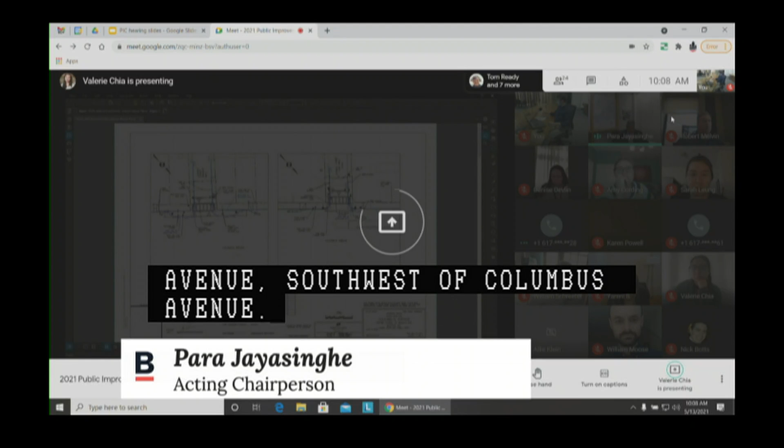Continuing to the public hearing segment of today's agenda, public hearing number 1 on a joint petition by the Massachusetts Bay Transportation Authority, the City of Boston Transportation Department, and the City of Boston Public Works Department for the making of specific repairs within the following public ways in Roxbury, consisting of curb realignment, sidewalks, and driveway curb cut reconstruction, as well as new and relocated pedestrian ramps, street lights, storm drain infrastructure, and raised sidewalks. Columbus Ave, generally between Cleve Street and Amory Street; Dixwell Street, southwest of Columbus Ave; Weld Avenue, southwest of Columbus Avenue; West Walnut Park, southeast of Columbus Ave; Bragdon Street at Columbus Ave; Academy Road, east of Columbus Ave; Amory Street, west of Columbus Ave. This was brought under new business on April 29, as shown on a set of plans entitled City of Boston Public Works Department, Engineering Division, Specific Repair Plan, Columbus Ave, Boston, 7 sheets dated April 29, 2021.

Thank you, Mr. Chair, and thank you, members of the Commission. I'm William Moose from the Boston Transportation Department. I'll be speaking on behalf of this project. I'm joined by Valerie Chia from Howard Stein Hudson, and also Eric Shire from the MBTA.

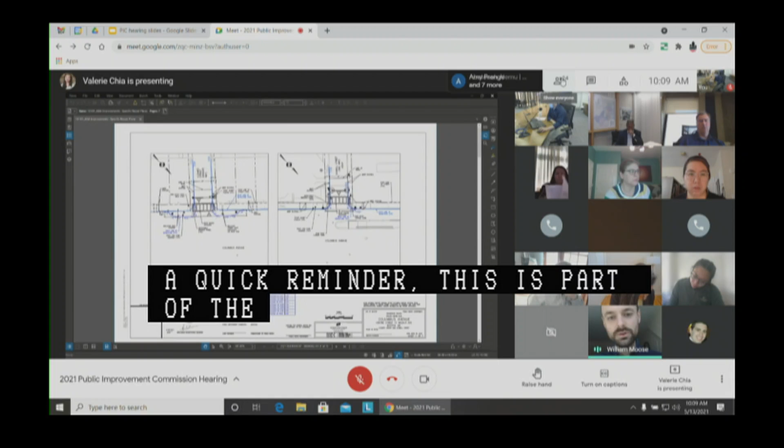Just as a quick reminder, this is part of the ongoing work to improve transit services along Columbus Ave through the bus priority corridor, along with the bus platforms and other transit measures that are already under construction. We're also making an effort to bring all of the ADA ramps along the corridor into compliance, and make pedestrian safety improvements wherever we can as well.

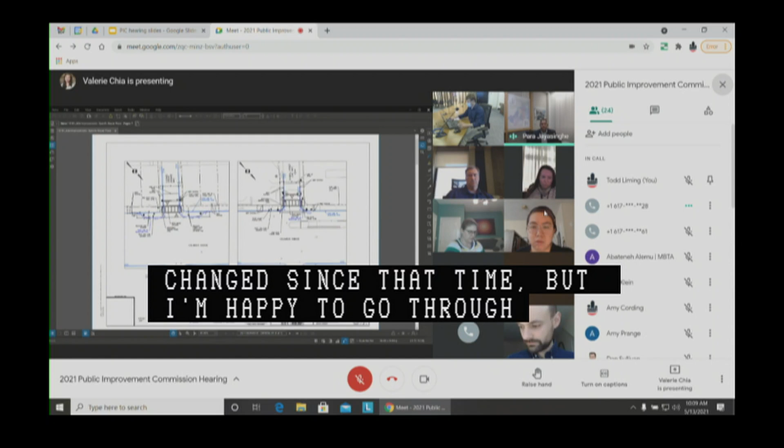And so these locations, we saw them at new business. The plans have not changed since that time, but I'm happy to go through them again if that would be helpful. Yes, William, since this is the public hearing and since these things are on tape, if you could go through them. Yep, absolutely. So the first location here is at Cleve Street.

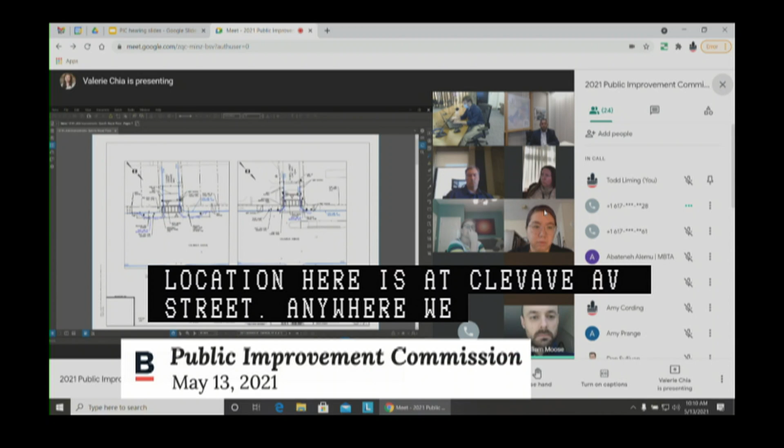Generally, anywhere we have a minor, non-signalized intersection with non-compliant ramps, we're showing a raised crosswalk being constructed. So the first one is Cleve Street. We're showing at this location some curb extensions to slow turning vehicles and improve visibility at this turn, and also to help us make the grades work better and get a better alignment of this crossing. That's the first raised crosswalk, at Cleve Street.

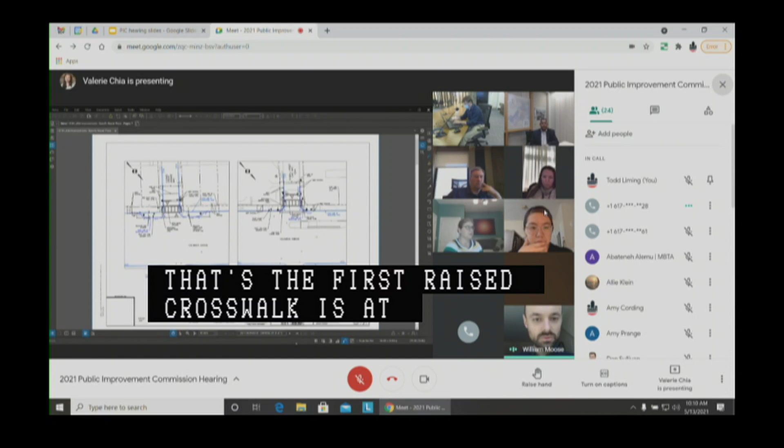Going north on the corridor, sort of towards Jackson Square, the next street is Dixwell Street. Dixwell Street does not have any curb extensions. We're keeping the curb lines as they are today, but we are proposing to add a raised crosswalk at that location, with the necessary adjustments to drainage and any other utilities at this and all locations.

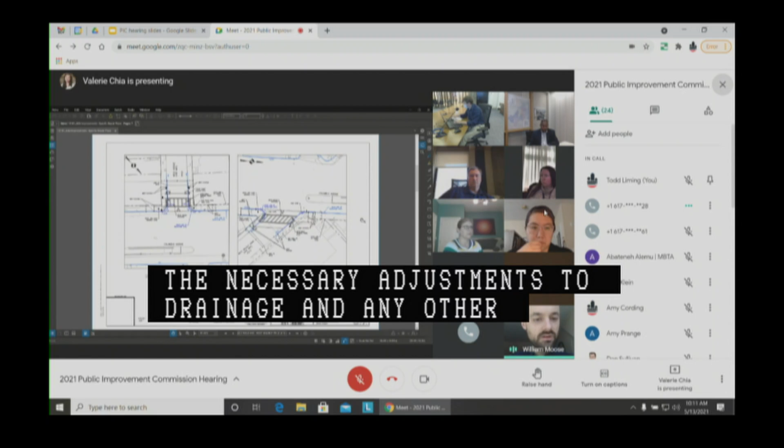So moving along, we also have the next intersection, which is Weld Avenue, another minor neighborhood street that we're proposing to add a raised crosswalk to.

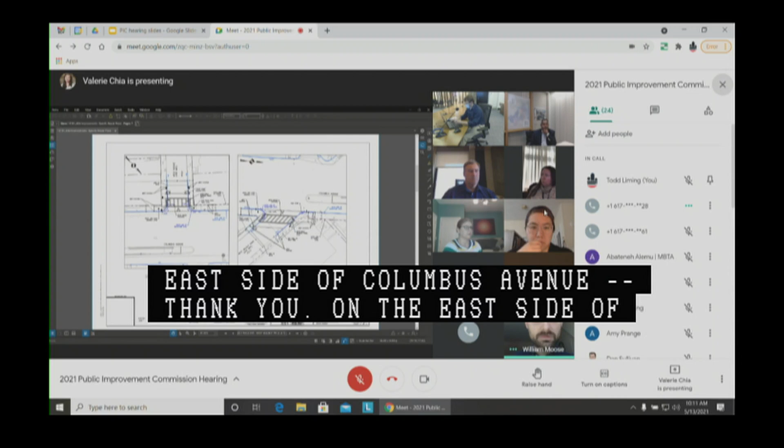And then continuing northbound on the east side of Columbus Avenue — sorry, if you could go back, Valerie. Thank you. On the east side of Columbus Avenue at West Walnut Park, we're also proposing, as part of the reconstructed ramps, a raised crosswalk at that location.

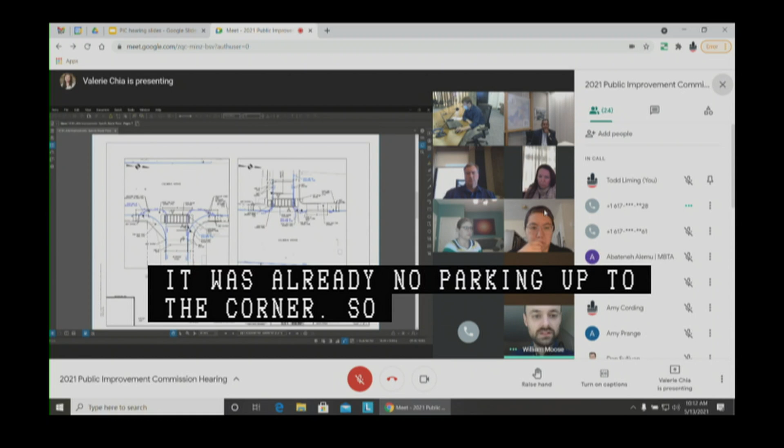So then moving on from there, the next location is at Academy Road. Here again is a location where we're proposing curb extensions along with the raised crosswalk. There's on-street parking along this portion of the corridor, and there was already no parking up to the corner, so we're sort of formalizing that through these curb extensions. Again, to slow turning vehicles and improve visibility, this dramatically shortens the distance of this crossing, which is very, very long today, and reworks the radii of these corners, as well as adding the raised crosswalk, to make this a significantly safer location.

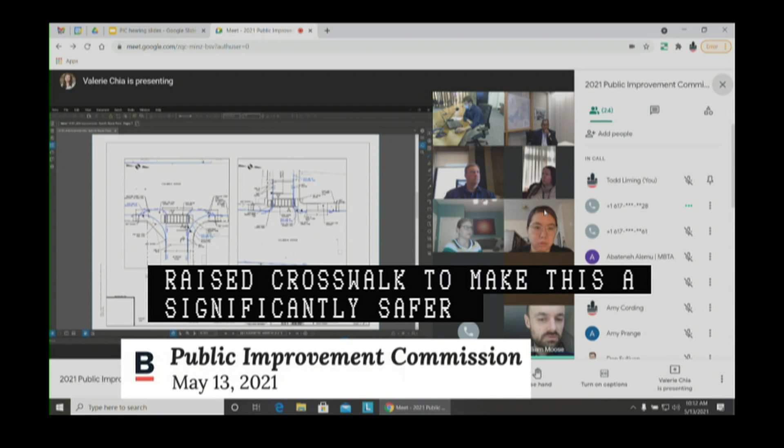And the final non-signalized location where we're adding a raised crosswalk is Amory Street. At this location, the curb lines are again staying the same, with the exception of some slight tightening of the corners, again to slow turning vehicles to more appropriate speeds. But those are all of the unsignalized locations and all of the raised crosswalk locations. I can pause there if there's any questions.

We do have one more intersection, at a signalized intersection, or I can continue and we can take all questions at the end, if that's preferable. Okay, William, if you could continue.

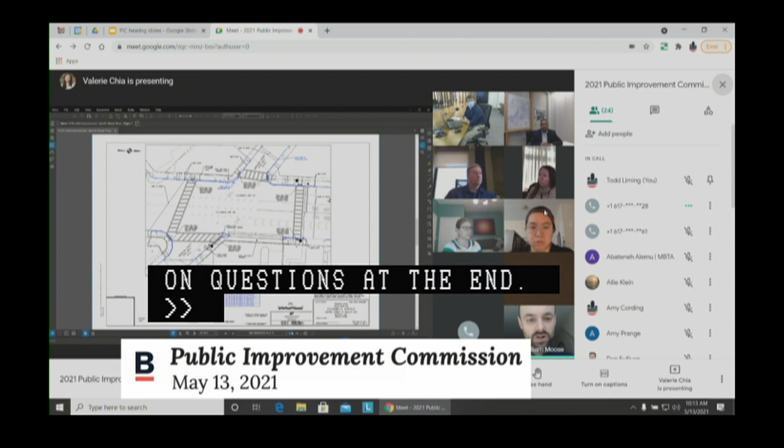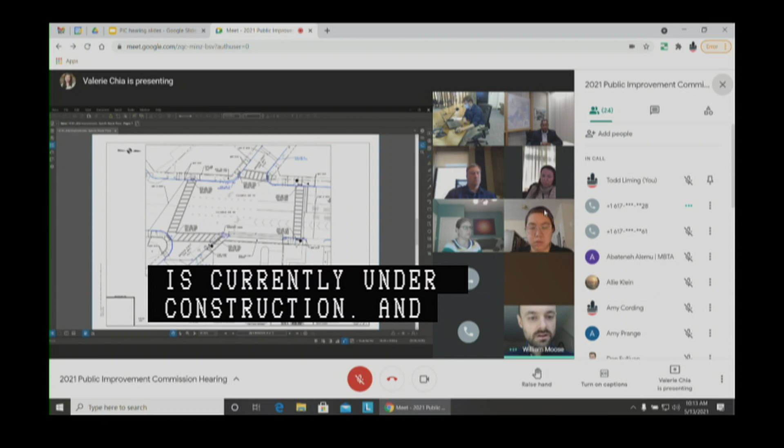Sure. So the final location is at Bragdon Street. At this location, we worked closely with the Boston Fire Department, because at the bottom of the page you can see the location of Engine 42, which is currently under construction. We worked closely with the fire department to find the optimal means of getting pedestrians safely across Bragdon Street and across the apron of the future fire station. At this location, as it is signalized, none of these crossings are proposed to be raised crossings — they are all conventional ramps, ramping down to the grade of the street. But we are adding pedestrian signals on all these minor streets that are lacking those today.

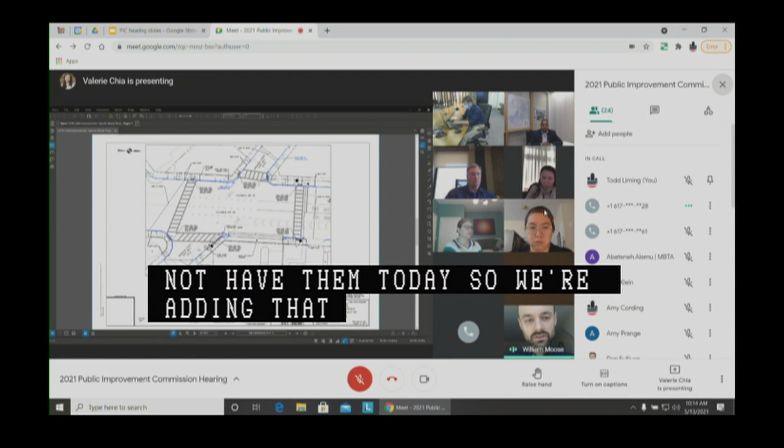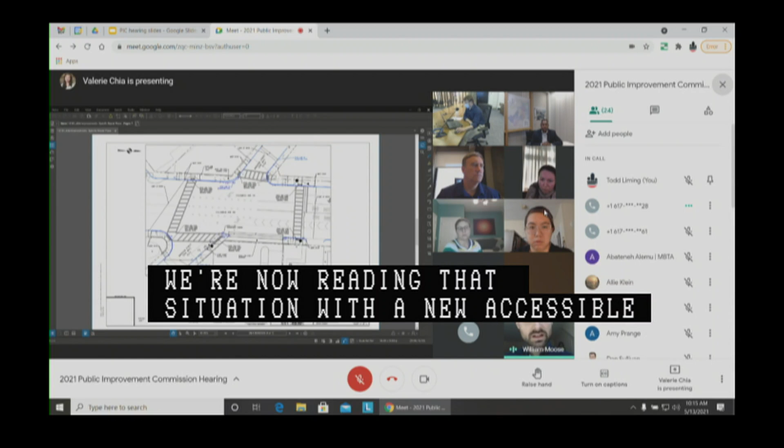So Bragdon Street does not have appropriate pedestrian signalization today. We're adding that along with reconstructing these ramps, and the crosswalk across Columbus Avenue - that is a new crosswalk. There was previously a marked crosswalk at this location, but there were no ramps and no break in the median, so it was completely inaccessible. We are now remedying that with a new accessible crosswalk with all the appropriate signalization at this location. So that concludes the extent of the project, and I'm happy to take any questions.

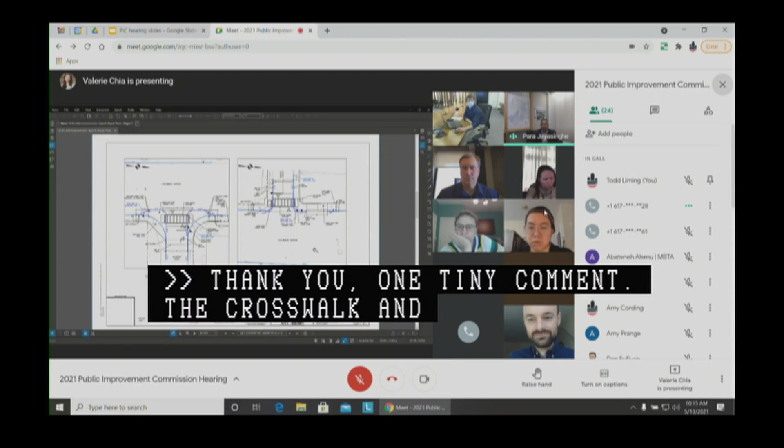Thank you, William. One tiny comment - the raised crosswalk at Amory Street and Columbus Ave, I know there's a fair amount of cut-through traffic that heads from this zone further south. They want to avoid the intersection of Washington and Columbus Ave, so they cut through here. So just respecting the volume of traffic that makes that right turn and goes down Amory Street, if appropriate signage can be placed to alert drivers that they're going to hit a raised crosswalk there. That's all I have.

Any additional comments by fellow commission members?

Good morning, William. How are you? Nice. I just wanted to follow up.

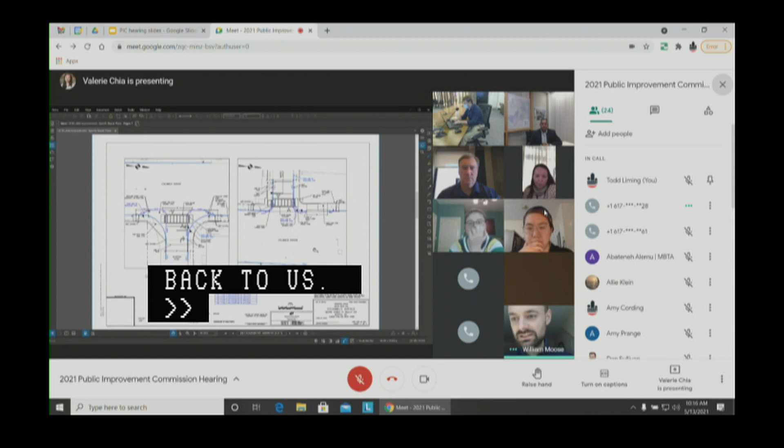I know you sent an email last night saying you were going to incorporate our comments into the construction drawing, so thanks for getting back to us. Oh, absolutely, yeah, we'll make sure all those are incorporated and we'll send them back to you for any final comments. Okay, thank you. Thank you, Denise.

Any additional comments by fellow commission members? Hearing none. Mr. Liming, are there any comments by PIC staff or members of our audience today? None.

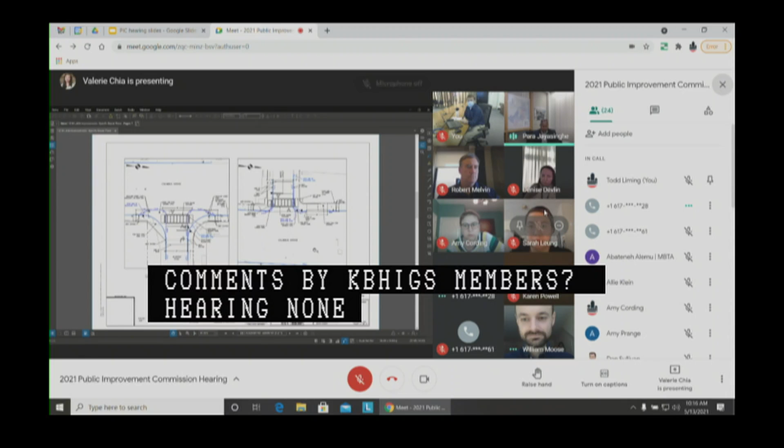That being said, I'll take a motion regarding public hearing number 1. I'll make a motion to approve a joint petition by the MBTA and the City of Boston Transportation Department and the City of Boston Public Works Department for the making of specific repairs in Columbus Ave, Dixwell Street, Weld Ave, West Walnut Park, Bragdon Street, Academy Road, and Amory Street, as read into the record by the chair.

Go ahead, second. Second. All in favor, please signify by saying aye. Aye. Anyone opposed or abstain? Hearing none, motion passes.

Thank you, Mr. Moose. You do fantastic work as always, and a great team.

Next item on the agenda, public hearing number 2, on a petition by Seaport L5 title holder LLC for the acceptance of pedestrian easements adjacent to Boston Wharf Road, a public way in South Boston, located on its southeasterly side at addresses 1 through 27, generally northeast of Congress Street. This was brought under new business on April 29th, as shown on plan entitled City of Boston Public Works Department Engineering Division Pedestrian Easement Plan, Boston Wharf Road, parcels L3 and L5, Seaport District, 1 through 27 Boston Wharf Road, South Boston, one sheet dated April 20th, 2021.

Good morning, Amy. Morning. Hi. Go ahead, good morning.

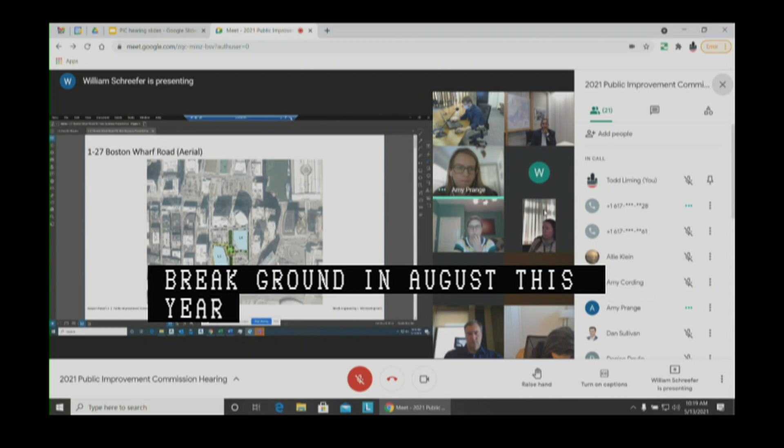Sorry, I just wanted to unmute. All right, so... all right, sorry.

So proposing specific repairs on Congress Street and Boston Wharf Road, coordinated with an overall roadway project. Sorry, I think this is the pedestrian easement. Oh, the pedestrian easement, I apologize. Yeah.

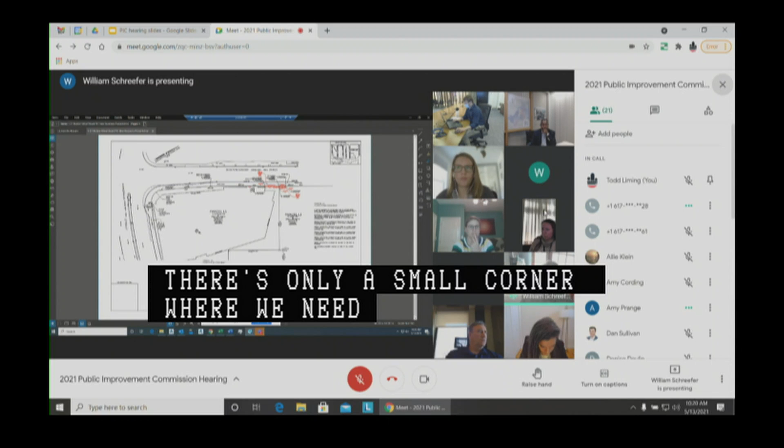So this is the pedestrian easement plan. There's only a small corner where we need to make sure that we have 8 feet provided overall, but obviously part of that's extending onto the private way. One thing I'd note is that a portion of this is on L3, so we'll be submitting separate easements for parcel L5 and L3 to extend where we need to provide that 8 feet, where there's going to be a small bump in the curb to provide parking. But that's really the extent of the pedestrian easement required on this project.

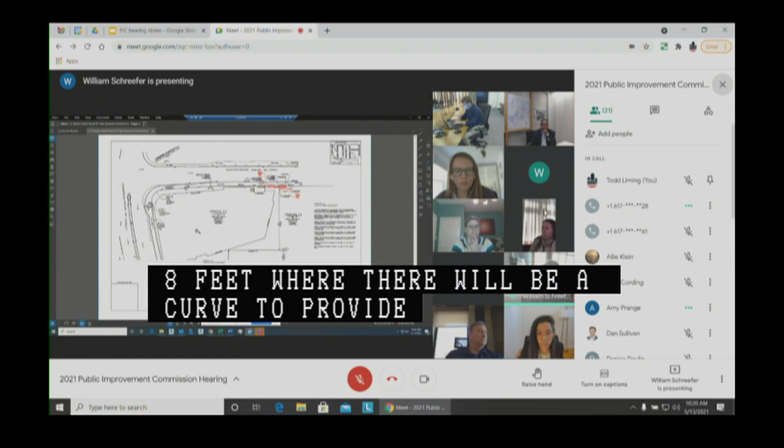Thank you, William. Any questions or comments by fellow commission members? Comments by PIC staff or members of the audience? None. I'd like to hear a motion regarding public hearing number 2.

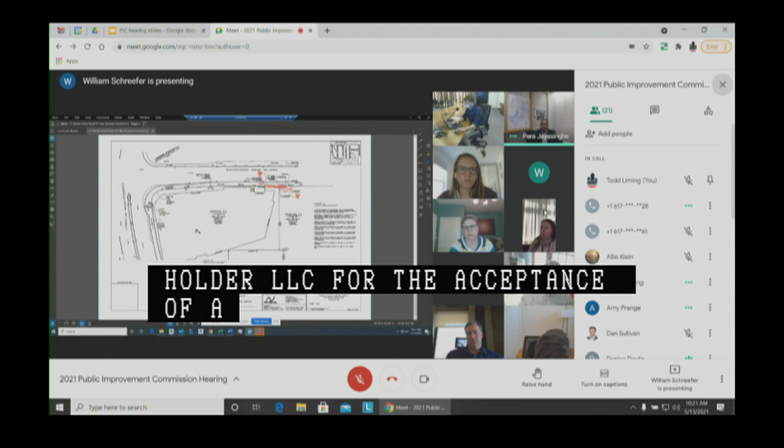I'll make a motion to approve a petition by Seaport L5 title holder LLC for the acceptance of a pedestrian easement in Boston Wharf Road as read into the record by the chair. Do I hear a second? Second. All in favor, please say aye. Aye. Aye. Anyone opposed? Hearing none, motion passes.

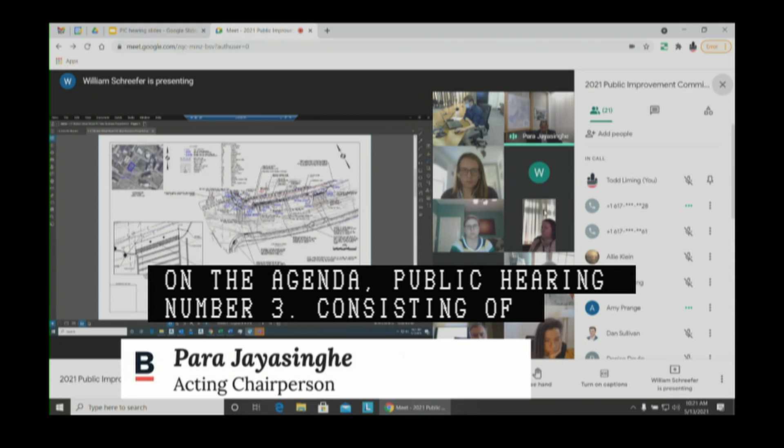Next item on the agenda, public hearing number 3 on a petition by Seaport L5 title holder LLC for the making of specific repairs within the following public ways in South Boston, consisting of curb realignment, roadway and sidewalk reconstruction, as well as new and relocated pedestrian ramps, specialty pavement, traffic signal infrastructure, street lighting infrastructure, street trees, planters, landscaping, street furniture, bike racks, storm drain infrastructure, irrigation infrastructure, bollards, driveway curb cuts, and wayfinding signage. This is all shown on Boston Wharf Road on its southeasterly side at address numbers 1 through 27 northeast of Congress Street, and on Congress Street, southeast of Boston Wharf Road.

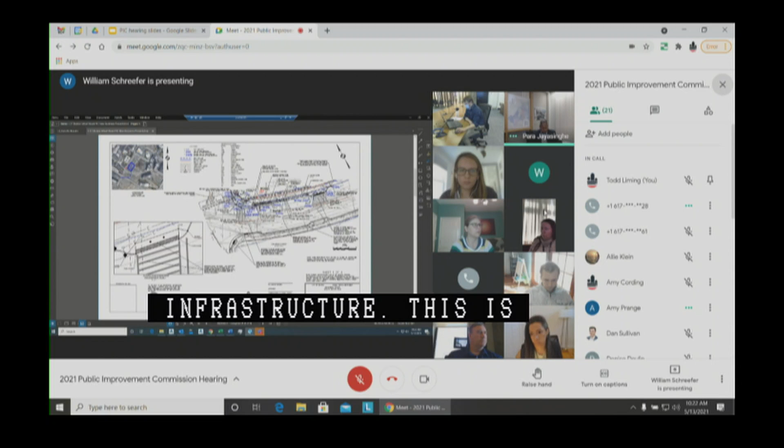This was introduced under new business on April 29th of this year, as shown on a set of plans entitled City of Boston Public Works Department, Engineering Division Specific Repair Plan, Congress Street, Boston Wharf Road 1 through 27, Boston Wharf Road, South Boston, 4 sheets, dated May 12, 2021.

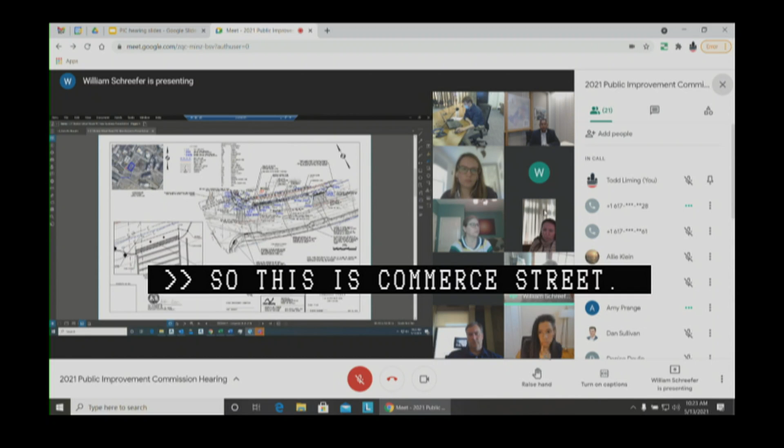So as I was just getting into, for L5 we're setting the curb based on... Excuse me, William, you need to introduce yourself because this is a separate public hearing. Understood. Will Schreefer with Nitsch Engineering, civil engineer for the project, presenting the specific repair plan. So this is Congress Street. We are setting the curb based on where it needs to be for the roadway project, and constructing everything inboard of that. So there's 360 linear feet of specific repairs along Congress Street.

Understood that Congress Street is currently under MassDOT jurisdiction, but it's going to be shifting to Boston ownership based on our understanding in the near future. So we're presenting these as if this is owned by the City of Boston. Proposing new cement concrete sidewalk, pervious pavers.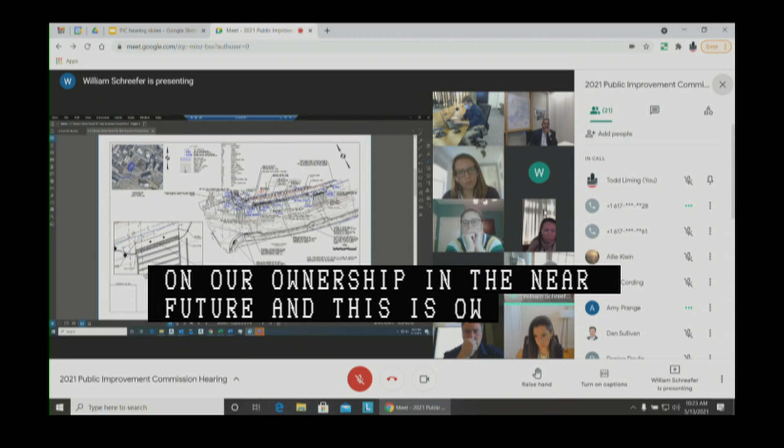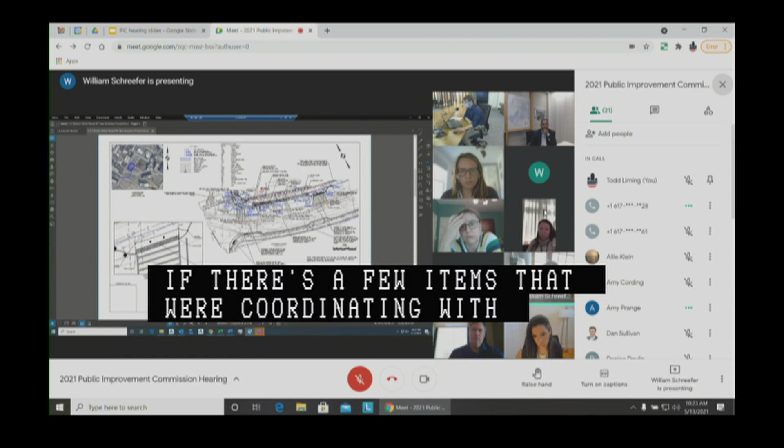There's going to be a bike station, 4 street trees going in, as well as pedestrian ramps at the corner. Over the past 2 weeks we've been coordinating with BTD and BPDA based on their comments, so this plan reflects the current state of coordination. I think there are a few items we're still coordinating with both BTD and BPDA. Reflective of that, we've shifted the location of the bike station closer to the intersection with Boston Wharf and Congress to provide better access, and kind of flipped that with the street trees and parking area we're providing.

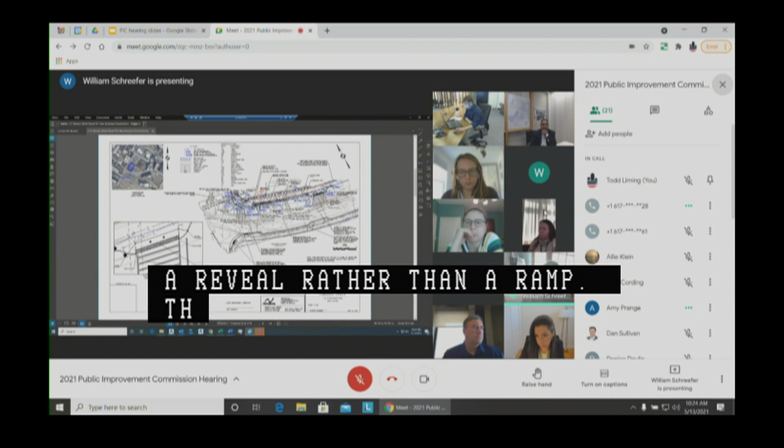There's going to be a mid-block bump out, but at this point that's going to be built with a full curb reveal rather than a ramp. The ramp itself would actually be constructed as part of the roadway project. So we'll be doing the bump out you see in the mid-block on Congress there, but that will be finished as a pedestrian ramp with bollards, depressed curb, and detectable warning surface as part of the roadway project when that comes through, providing well over 8 feet of pedestrian sidewalk throughout on Congress.

And as part of coordination with the BPDA, we have widened the access to the elevated walkway along Boston Wharf from 7.5 feet to 8.5 feet on its access from Congress.

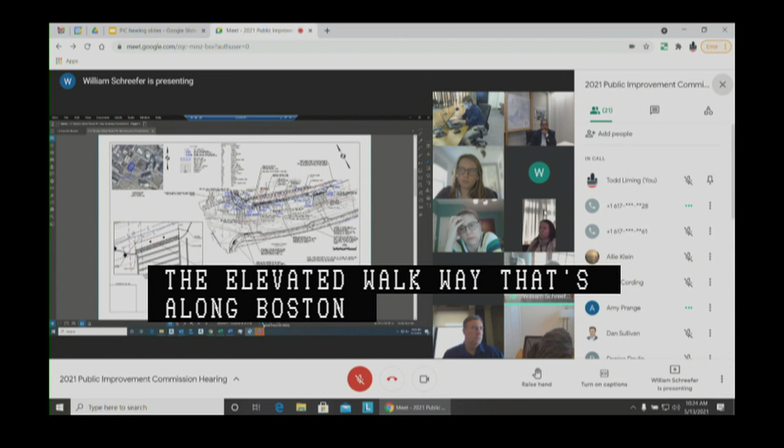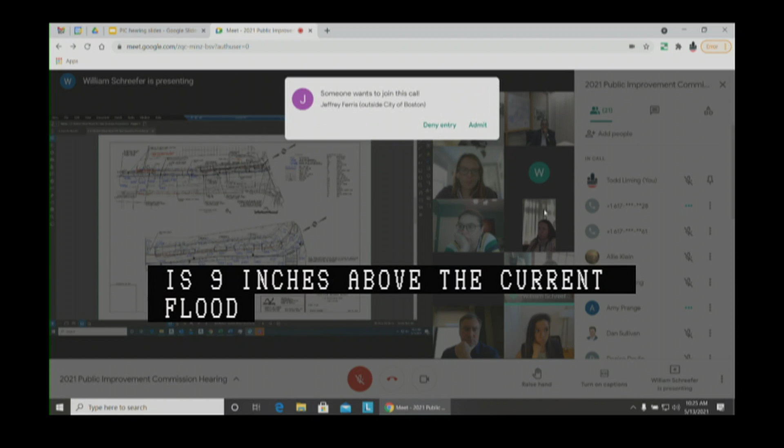Shifting to the Boston Wharf Road plans, a portion of this site is in a flood zone, so we wanted to pursue a resilient design that elevated it as much as possible above the floodplain to target future sea level rise conditions. We've raised all the retail entrances along Boston Wharf Road to 17.25, which is about 9 inches above the current floodway. So you have the separated elevated walkway along with the provided public way access, and there's access to that elevated walkway as mentioned from Congress Street. There's also a ramp down on Boston Wharf towards the north end that connects back with the public way.

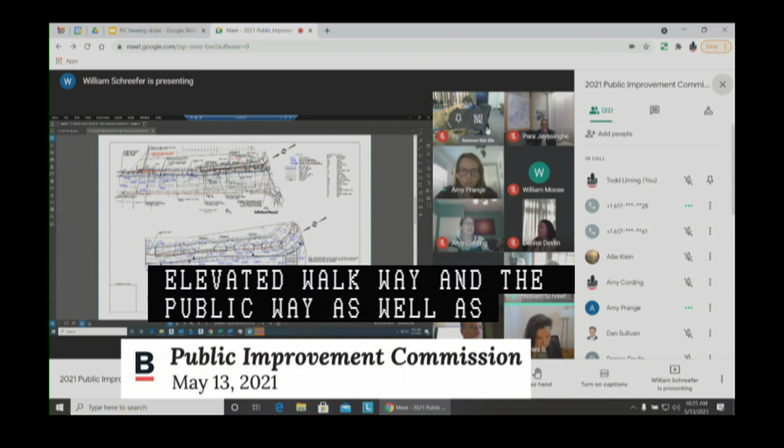Providing landscape beds in the separation between that elevated walkway and the public way, as well as stairs that would also provide direct access to the storefronts that are in there, and small trees that would be able to survive in the landscape beds that are there up against the building as they are.

This is where the pedestrian easement is being proposed on the northwest corner of the building, where we need to provide the minimum of 8 feet.

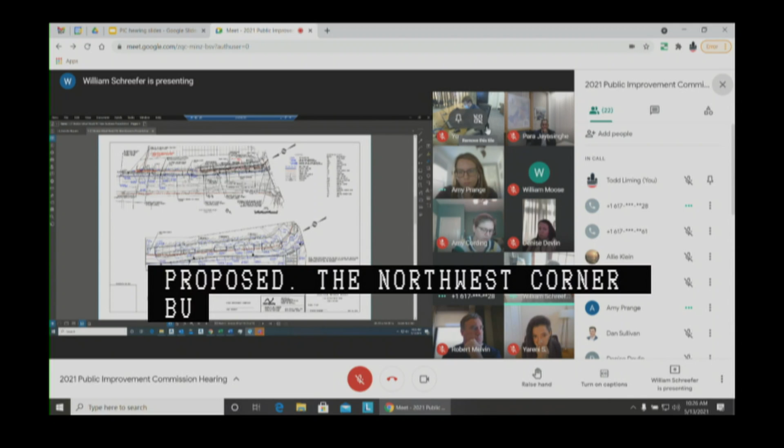As part of coordination with BTD, we had a portion of the pickup drop-off along the north end of this that will be fully built out when L3 comes through, included on the specific repair plans. We expanded that by an additional 40 feet to accommodate 2 potential extra parking/pickup drop-off spaces along there.

We have modified the locations of a few light poles to accommodate changes in the landscape beds and stairs, and recessed doors at the building to provide at least 6 feet of clear space between the door swings and the edge of the sidewalk/stairs, to accommodate comments from the BPDA on providing that amount of clear space up there.

Generally, it's about 6.2 feet in width, but we have modified the design of the doors and the overall landscape beds and stairs to accommodate a minimum of 6 feet everywhere.

That is the extent of the specific repairs that are being proposed on this project, reflective of our latest coordination with BTD and BPDA.

Thank you, William. At this point, are there any comments by fellow commission members?

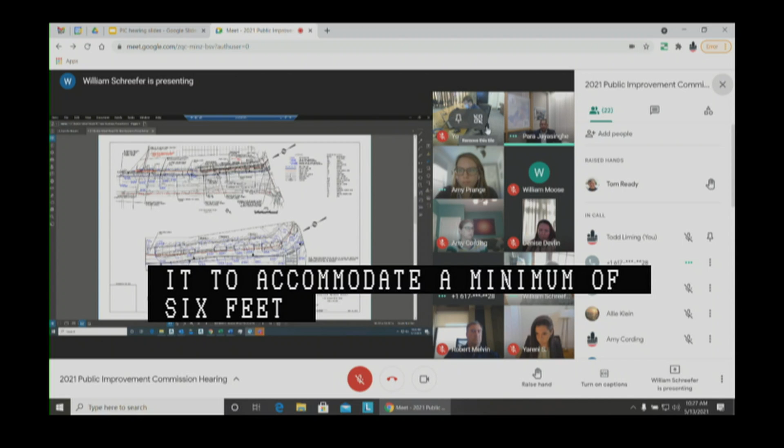We would just like to thank the team for incorporating that second accessible route near the intersection. We appreciate their receptiveness to that suggestion.

Thank you, Ms. Young, for your comments. Any further comments? Sorry, excuse me. I'm sorry, Para, I just had a general comment.

I was just curious where we were in the site plan review process for Boston Water and Sewer. Our initial submission has been returned with comments. We returned a new submission with responses to those comments and additional documentation from the MEP this week, so we'll be moving forward with the site plan approval process from there. Okay, thank you.

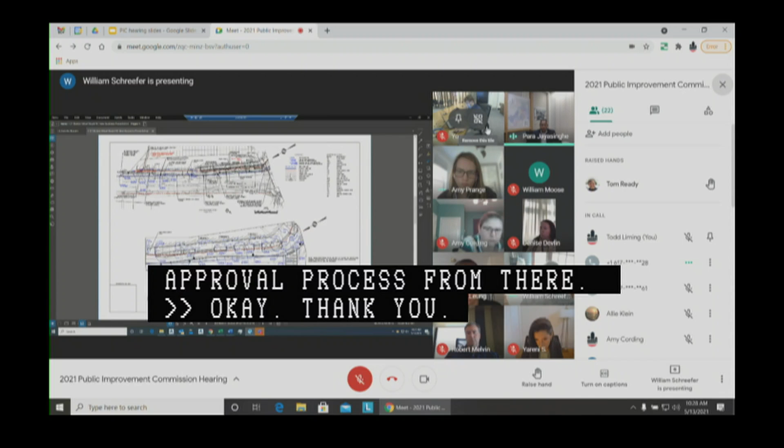William, will any of those comments impact the plans that you have put forth in front of this commission today? No, largely the comments are about that we're proposing a rainwater reuse system as part of the building. So it's neutral, it's not going to impact. No, will not impact. Thank you, William.

Any further comments by commission members? Ms. Prange, what is the status of the maintenance agreement for all of this good stuff?

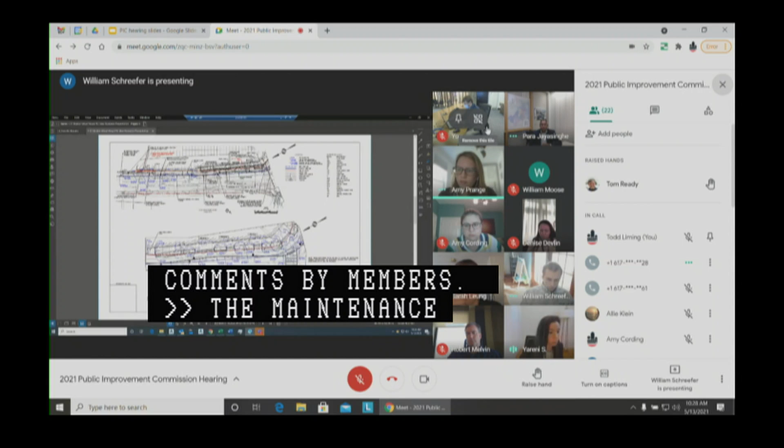I think Jody, you have been back and forth with Leung. Yeah, we'll be submitting them shortly this week. It's going to be a separate amendment though, right? To the LMA, master LMA. Yes, that's right, we are coordinating with the city regarding an update to the master LMA.

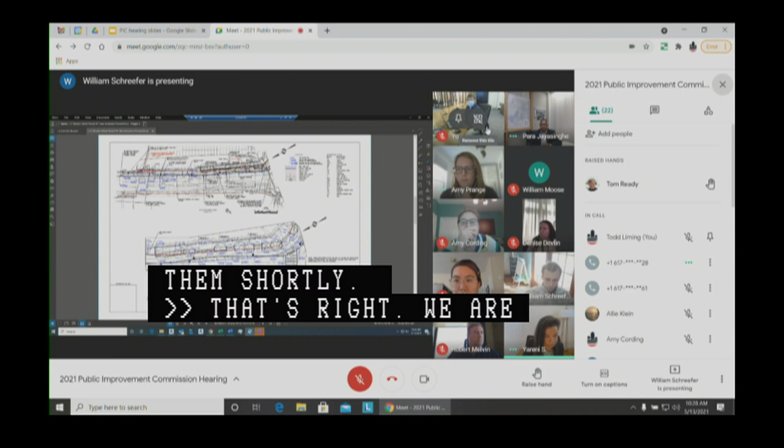Thank you. Mr. Liming, any comments by PIC staff and all members of today's audience?

Mr. Tom Ready would like to speak. Go ahead, Tom. Thanks, Todd. Thanks, Para.

Just a question with regard to accommodation for cyclists along Congress Street. I wasn't able to see how that was going to be done. I know I've seen the TAPA for Boston Wharf Road, and it's not obvious to me how cyclist traffic is accommodated on Congress Street.

Right now, there are no dedicated bike lanes planned for Congress Street. So the plan is to mix them in with traffic? I believe so, yes. Okay, and we think that's appropriate?

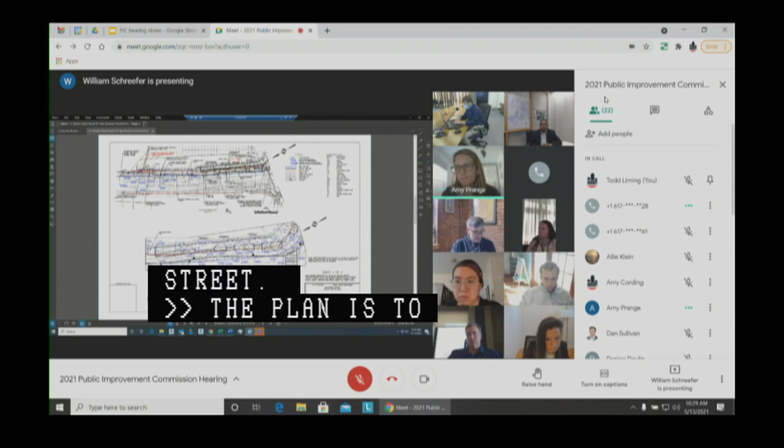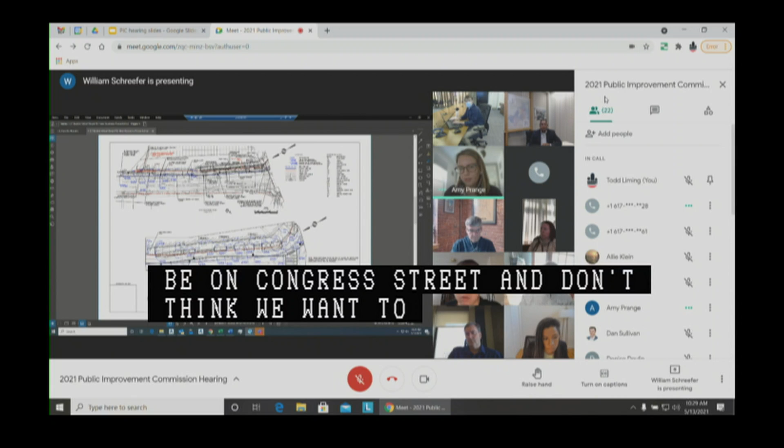We've done several studies on how you could add bike lanes to Congress Street. There's a city project where there might be BRT on Congress Street. I don't think we wanted to commit to anything on Congress Street, so right now Boston Wharf Road is really where we're focusing our major bike lane improvements on.

So the city assumes that people riding bikes down Congress Street through the Gateway Project are going to stop at Boston Wharf Road and they're not going to continue? So we're going to provide an unsafe, a less safe condition as they head down towards those stairs in the plaza, the attraction point for Seaport Square.

It just doesn't appear as though it's frankly well thought out. So that's my comments, Para. I'll follow it up in writing.

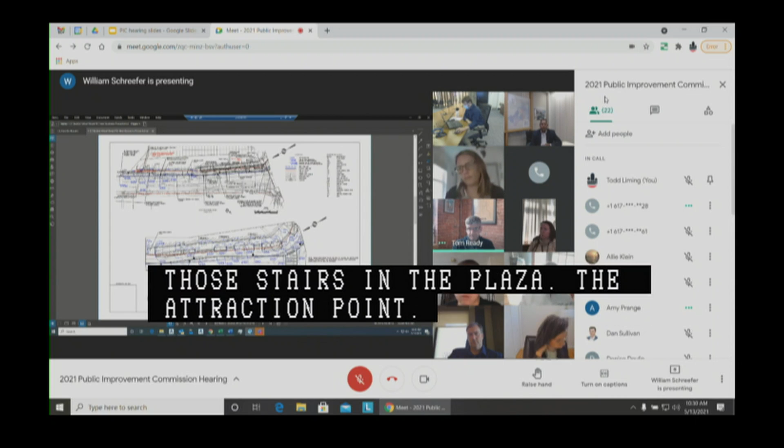Thank you, Tom. Give me a second because your comments are a little bit interesting in that sense. So Ms. Cording from BTD, Amy, do you want to respond to Mr. Ready's thoughts?

Yeah, I mean, it's essentially that we're trying to figure out Congress Street. I don't think we're ready to answer that because we're fitting it together. We have the Public Works project further up, and there are other pieces we're trying to understand, inclusive of the bus and how it interplays with everything else. So I just don't know that we're ready. Not that we don't think bikes should be on Congress Street, I just don't think we're at a point where we could successfully figure out what would be here that would be future-proof.

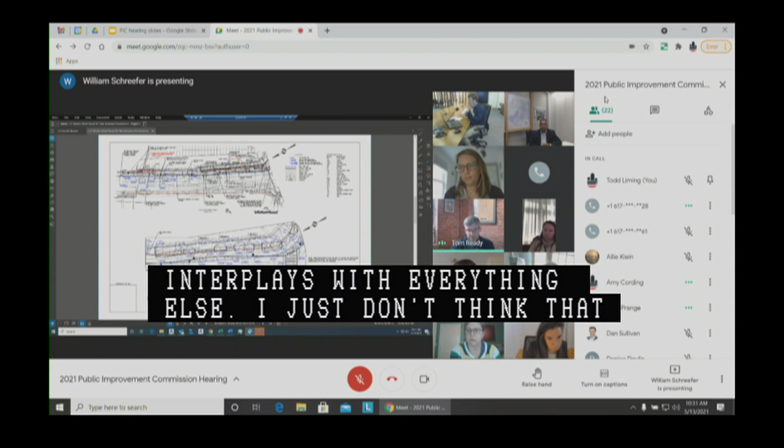So I'm aware, Amy, of BRT up on Summer. I'm not aware of a BRT project on Congress. In fact, the last discussion I had with Matt Moran was that the city wasn't anticipating BRT on Congress. Yeah, so I think it's really just that the conversation with Summer and that bus lane, and all of the bus movements through here, is still open. We're still in that conversation.

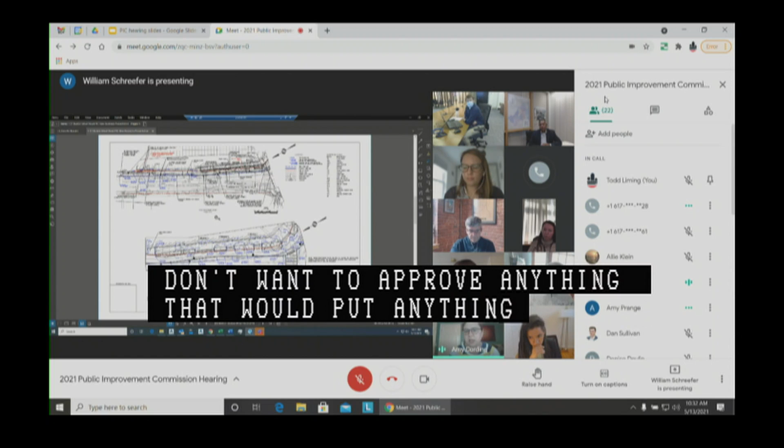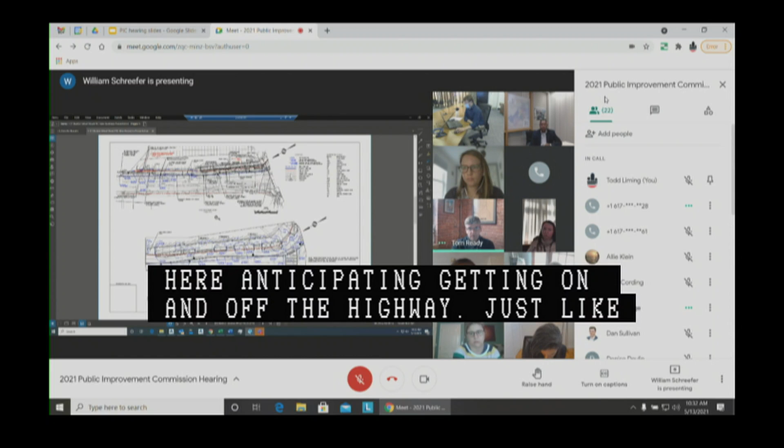So it's just that we don't want to approve anything that would put anything in the way of future possibilities. I think in the future there's probably a need for cycle infrastructure up here, I just don't know where or what that should look like. It becomes complicated, as you guys all know, with the on and off ramps onto I-90 as it approaches those intersections. I get that. It's just confusing as to why we wouldn't be thinking about vehicles speeding down here anticipating getting on and off the highway, just like they do along Atlantic Avenue and in the downtown area. So a well thought through approach is really needed to provide safe passageway for cyclists, right? I think we'd all agree.

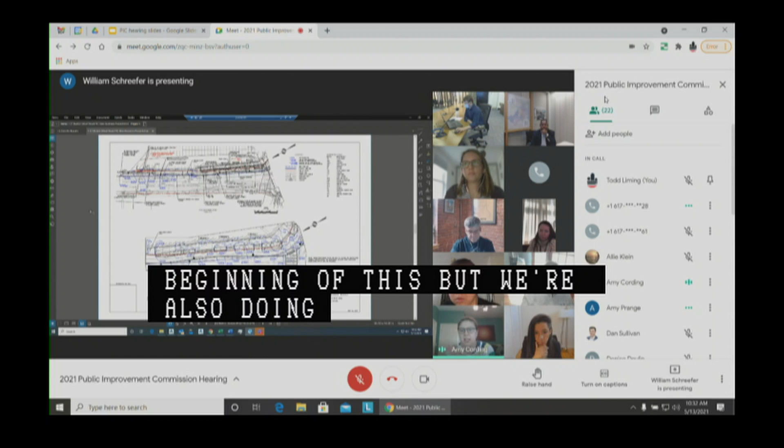One thing I would also add, alluded to earlier, is that there are some jurisdictional issues out here, and some streets that are in MassDOT control that are coming to the city. So our ability to make firm decisions on the future of Congress Street really depends on when it becomes ours. Right now we can't declare anything required on a street that's not ours, but we do know it's going to become ours, and we are thinking about its future.

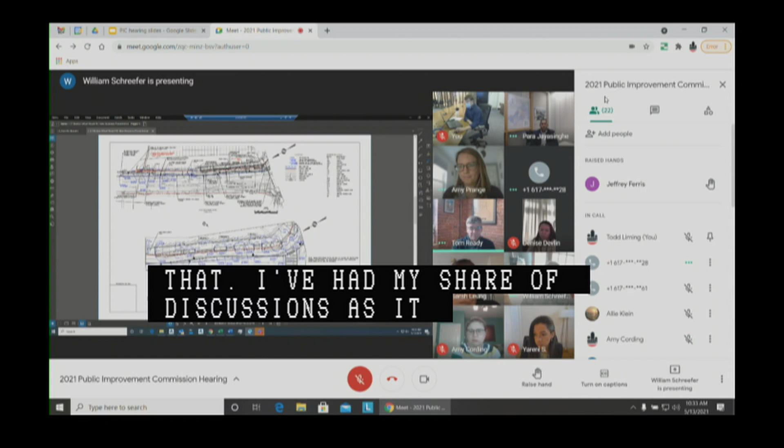Yeah, thanks, and I appreciate that, Amy. I've had my share of discussions with MassDOT, as it relates, and Massport, as it relates to Northern Avenue, so I understand. Okay, thank you. Thank you, Para. Tom, thank you and appreciate your comments. Scott, appreciate your feedback. Any further comments by members of the audience?

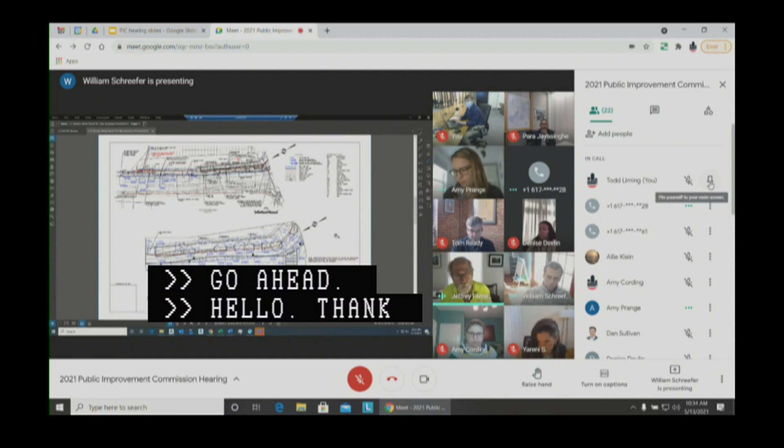Yes, Mr. Jeffrey Ferris, go ahead. Hello, thank you. I would concur with Tom Ready's comments that there needs to be a bike accommodation here. It looks like I meant to come for the Columbus Avenue discussion, and we have the same issue there, where a project went forward without bike accommodation, saying 'we're going to do that later.' But if the city's committed to a complete streets program, you need to have a complete plans program, not say we're going to do that later. So I agree wholeheartedly that there needs to be better bike accommodation here.

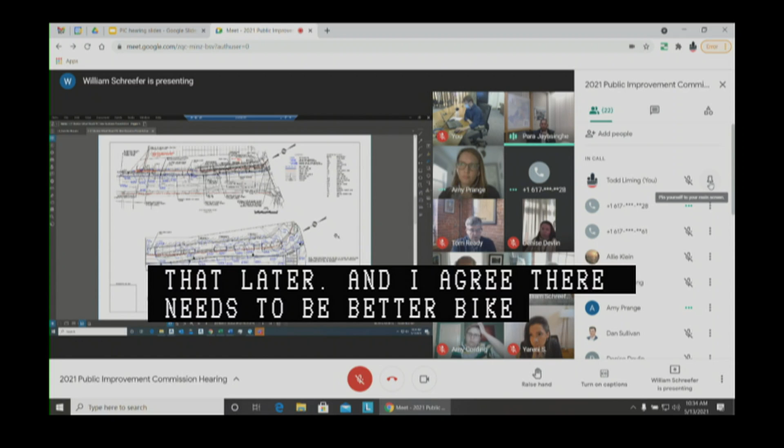Thank you, Jeffrey. It's always good to see you and hear your concerns, well articulated as always. But I think I'm confident to say that the city forces and city departments are equally minded in understanding that we need truly a multimodal transportation system. It's just an issue of timing these efforts and integrating the best use of our roadways. And I believe Ms. Cording responded to your similar sentiments as mentioned by Mr. Ready.

Thank you, Jeffrey. Any further comments by members of the audience? Nobody in the audience. I will mention, just for the record, this is actually on a co-petition by Seaport Square Development Company, LLC. Just a matter of housekeeping. Thank you, Dan.

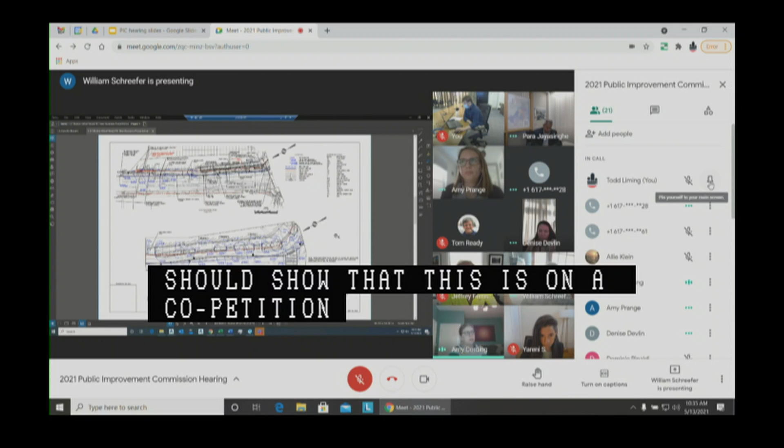Seeing no further comments, I would like to get a motion regarding public hearing number 3. I'll make a motion to approve a petition by Seaport L5 Title Holder LLC and Seaport Square Developer LLC, did I get that right, Todd? All right, for the making of specific repairs on Boston Wharf Road and Congress Street, as read into the record by the chair. Second. All in favor? Aye. Anyone opposed or abstain?

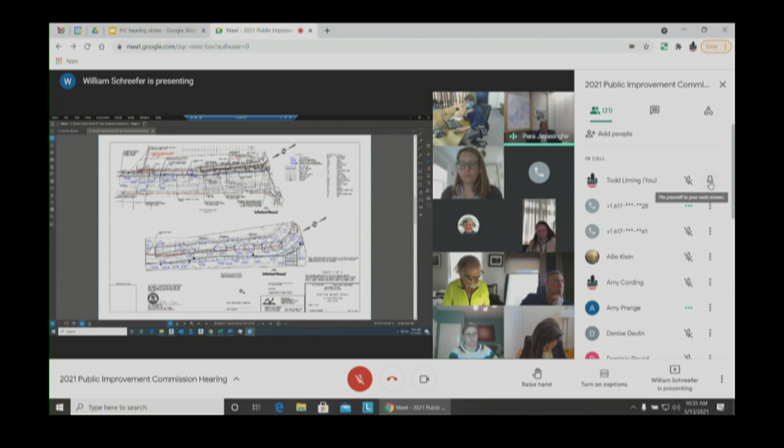Motion passes. Next item on today's agenda, public hearing number 4, on a petition by Seaport L5 Title Holder LLC for the granting of a projection license for the installation of a canopy over a portion of the sidewalk within Boston Wharf Road, a public way in South Boston, located at the easterly corner of its intersection with Congress Street, generally at addresses number 1 through 27. This was shown under new business on April 29, as shown on a plan entitled City of Boston Public Works Department, Engineering Division License Plan, Boston Wharf Road and Congress Street, 1 through 27 Boston Wharf Road, Seaport District, one sheet dated March 2021.

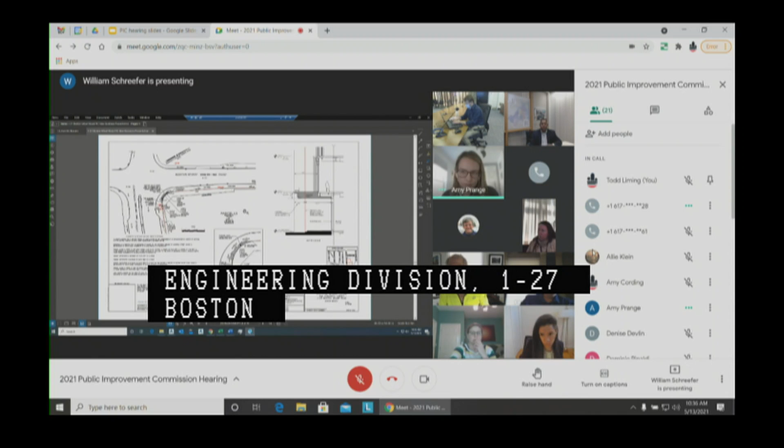So this is the canopy license plan being proposed in front of you. It's really just at the corner of... William, if you could... Sorry, this is Will Schreefer with Nitsch Engineering. Thank you.

So this is the canopy license project. It's really just at the corner of Congress Street and Boston Wharf Road where the property line itself is rounded. We're proposing a small extension in that area for the canopy line as it goes around that corner. That is the extent of the canopy license that we're requesting on this project.

Thank you, William. Comments by commission members? Hearing none.

Comments by PIC staff and all members of today's audience? At this point, I'd like to hear a motion regarding public hearing number 4.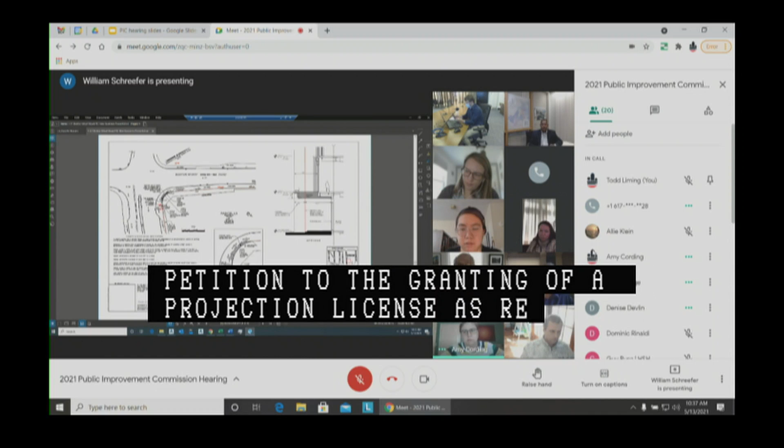I'll make a motion to approve a petition by Seaport L5 Title Holder LLC for the granting of a projection license in Boston Wharf Road as read into the record by the chair. Second. All in favor? Aye. Anyone opposed or abstain? Motion passes.

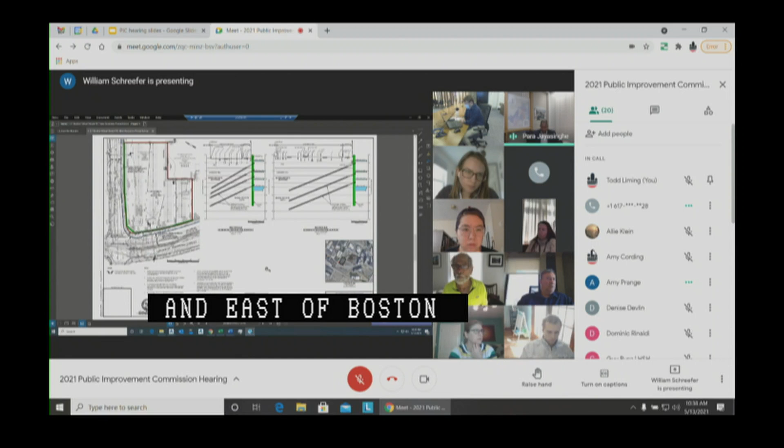Next item, public hearing number 5 on a petition by Seaport L5 Title Holder LLC for the granting of an earth retention license for the installation of a temporary earth support system within the following public ways in South Boston: Boston Wharf Road on its southeasterly side at address numbers 1 through 27, northeast of Congress Street on its northeasterly side, southeast of Boston Wharf Road. This was brought under new business on April 29, as shown on a plan entitled City of Boston, Public Works Department, Engineering Division, Temporary Earth Retention Plan, Boston Wharf Road and Congress Street, Boston, one sheet dated April 28, 2021.

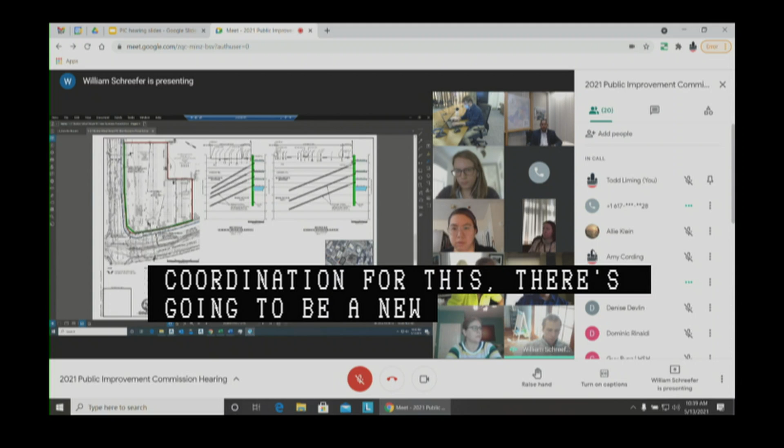So this is Will Schreefer with Nitsch presenting this plan. As you see in front of you, this is the temporary earth retention plan with sections along Boston Wharf Road and Congress Street showing the temporary support of excavation that would extend into both roadways. The tiebacks shown there are temporary and would be detensioned and abandoned in place after work is completed. As part of coordination for this, there's going to be a video inspection of a BWSC drain main that is going to be included on our plans and as part of the site plan approval. But otherwise, generally, that is the extent of the plans and the comments that we have received on this process.

Thank you, William. Comments by commission members? Hearing none. Comments by PIC staff and all members of this audience?

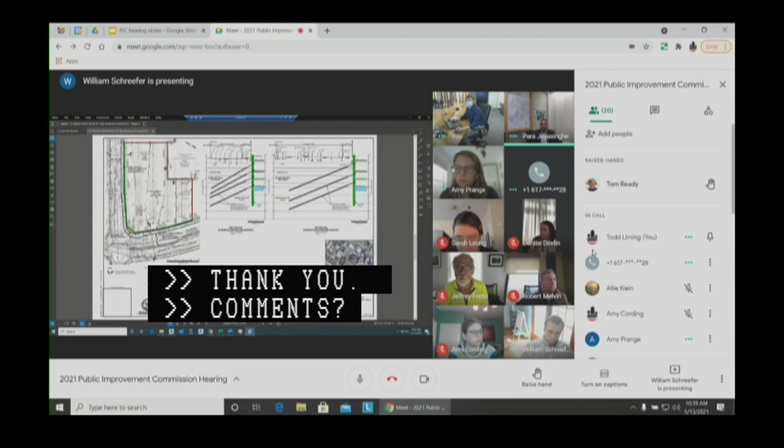Go ahead. Yeah, thank you again, Todd. Just a quick question with regard to groundwater, the groundwater trust and whether the well monitors that are in place along Congress Street are sufficient for this parcel. I don't know if that's been looked at.

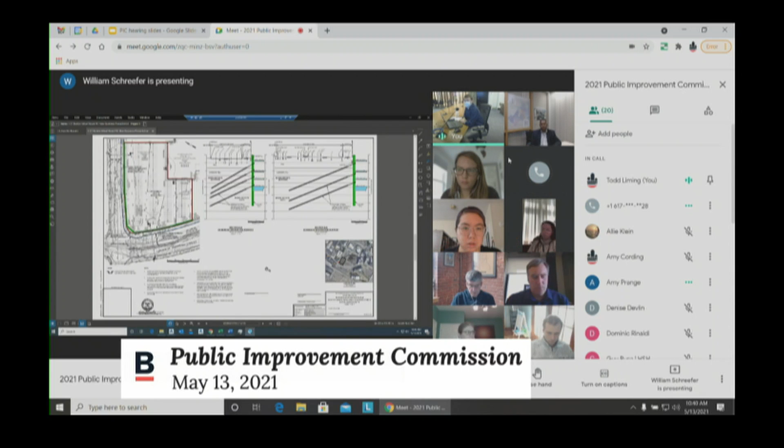Thank you, Tom. Normally, these plans are sent towards the Boston Groundwater Trust. Mr. Liming, could you fill in the blanks? I believe that there are a number of water monitoring wells in this general area. I would imagine that they're not going to be impacted by this project. I would have to defer to the Groundwater Trust as to whether additional wells are needed in this area, but I'm happy to check with Christian Simonelli and check back with the commission after the fact.

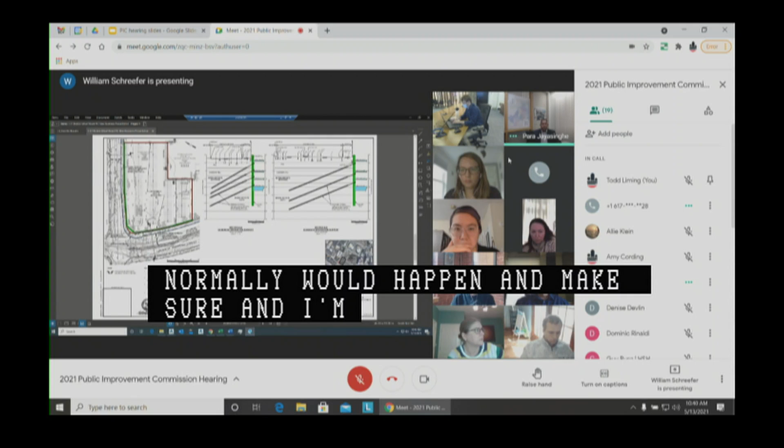Okay, thank you. I'm sorry, Mr. Ready, it is normally our process where all these plans do go up to the Groundwater Trust, and if they feel the need for the inclusion of any additional wells, they do let the PIC staff know. So that's what normally happens, and Mr. Liming will make sure, I suppose, that that process was followed on this occasion, and if they are needed, they will be included, and I'm confident that the petitioner will take the necessary steps to install any additional monitoring wells. Is that safe for me to say, Ms. Prange? Yes, that's correct. Absolutely.

Thanks, Tom. Yeah, I just wasn't sure within the process itself when it is, when it occurs prior to or after or in conjunction with, right? Thank you. Thank you, Tom. It's always good to hear you. Any further comments by members of our today's audience?

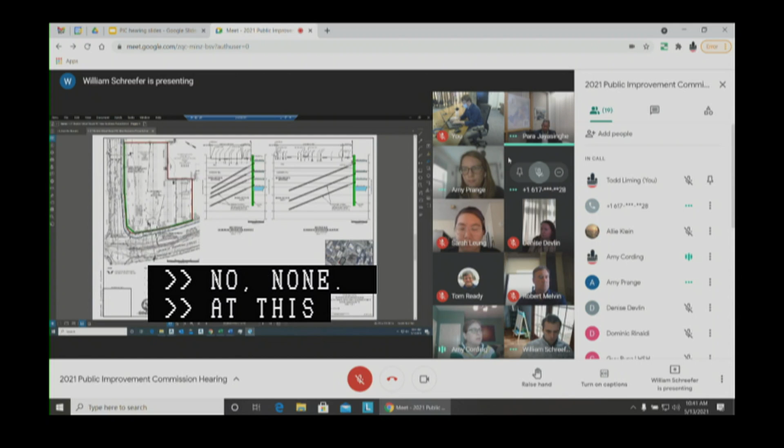No, none. Wonderful. At this point, I'd like to hear a motion regarding public hearing number 5. I'll make a motion to approve a petition by Seaport L5 Title Holder LLC for the granting of an earth retention license in Boston Wharf Road and Congress Street as read into the record by the chair.

All in favor? Aye. Anyone opposed or abstain? Motion passes. That concludes the public hearing segment of today's agenda.

Now we shall move to the new business portion of today's hearings. New business item number 1, Gurney Street, Tremont Street, Station Street, Roxbury, route of location on a petition by Eversource Energy.

Good morning, Dominic Rinaldi with the BSC Group on behalf of Eversource Energy, and I believe there are a couple of Eversource folks on the line as well. If they are, I'll let them introduce themselves. Hi, this is Allison Klein, I'm the underground transmission engineer on the project from Eversource. Okay, that would seem to be it.

The project involves granting a location for underground conduit and wiring to install a reverse current switch. If I may present, I do have a plan, if that's all right. Please go ahead, we do need to see something going on.

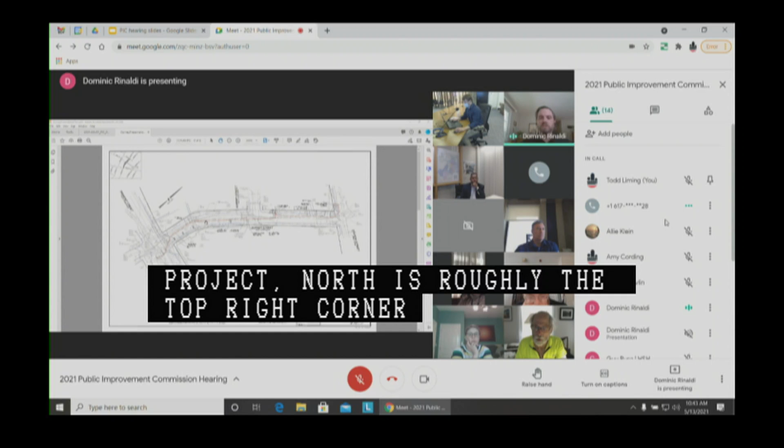Go ahead, Dominic. So on the plan, we just updated it to show the proposed line in red and the existing curb lines in blue. To orient you, project north is roughly the top right corner of the plan. Down at this end, south end of the project, is Tremont Street, and Gurney Street runs roughly south to north to Station Street. There's also an intersection here, which is weirdly enough also called Gurney Street.

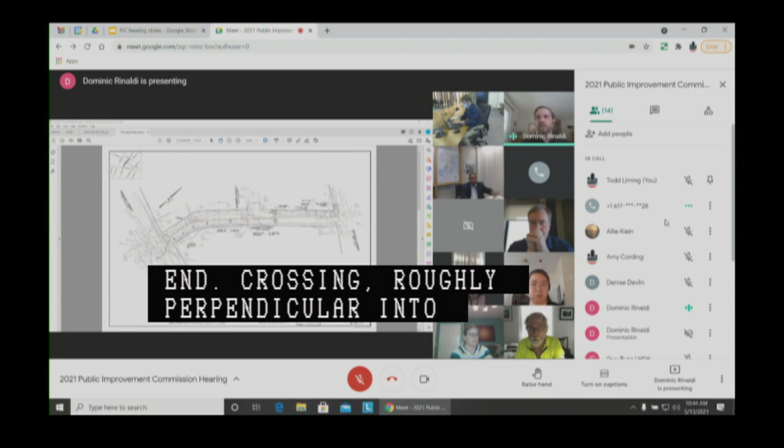Down at the south end of the project is the Roxbury Crossing T station. The project basically involves installing a bonding manhole at the south end in Tremont Street, crossing roughly perpendicular to Tremont Street into Gurney, installation of another pull manhole for cable friction and tension purposes, continuing down Gurney Street past the intersection where we'll switch over to the west side of the street, install a reverse current switch, which will be located in a small metal above-ground enclosure in the sidewalk between two street trees, and then continuing back along the west side of Gurney Street into Station Street and connecting to an existing MBTA manhole in Station Street.

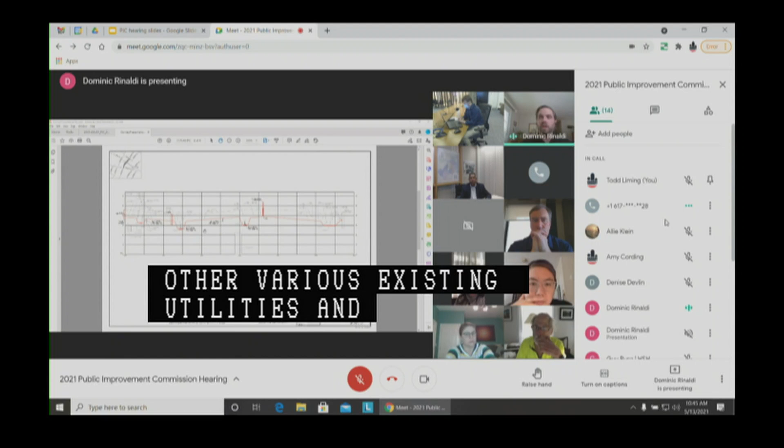From a profile view, you can see again in red, starting left to right on Tremont Street and the bonding manhole, running generally about 3 feet below grade, except where we have to dip below other existing utilities, coming to the pull manhole, the reverse current switch above grade, and then ultimately connecting back into that MBTA manhole. Through the review process, the line has shifted a little bit here and there.

One of the big drivers was agreement with Boston Water and Sewer to maintain a minimum of 3-foot horizontal separation where we roughly parallel their drain, sewer, or water lines, and an 18-inch minimum vertical separation everywhere we have to cross their lines, which is generally what we're trying to maintain with other utilities as well.

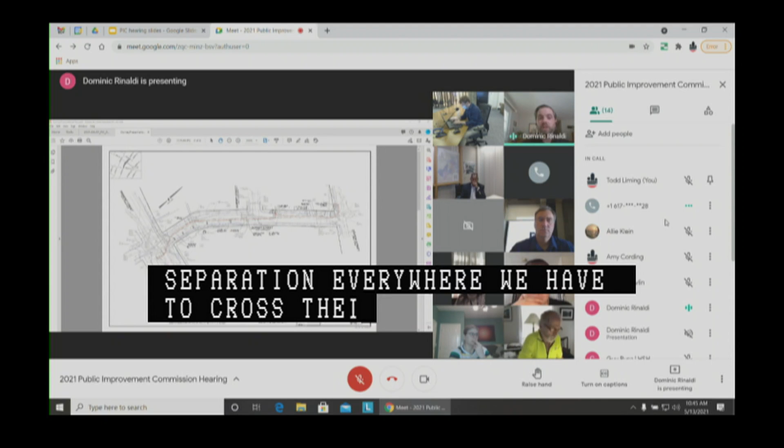The project would be looking to start and go in the ground basically as soon as possible. It's getting late in the spring to call it spring, so we'll call it early summer, and it should take roughly, the estimate is, 3 weeks to a month to complete.

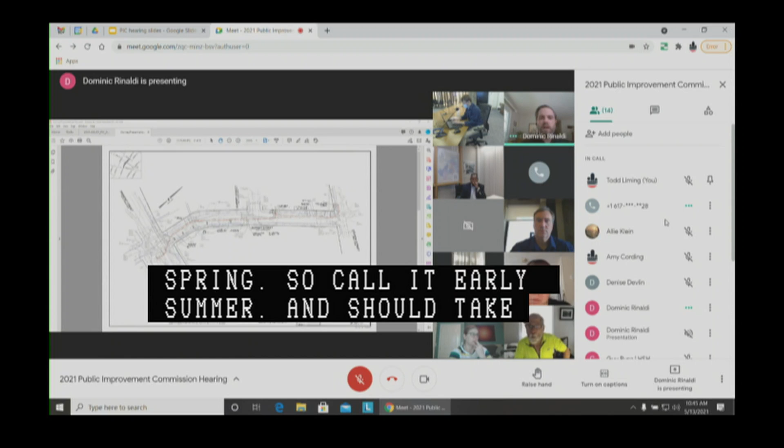We have prepared some traffic management plans that we will be submitting to BTD for their review and approval, but as a preview, it would involve effectively two motions to cross: 2 setups to cross Tremont Street and the southern end of Gurney Street, where you can see we're roughly in the middle of the street, because this is the congested portion of the street when it comes to existing utilities.

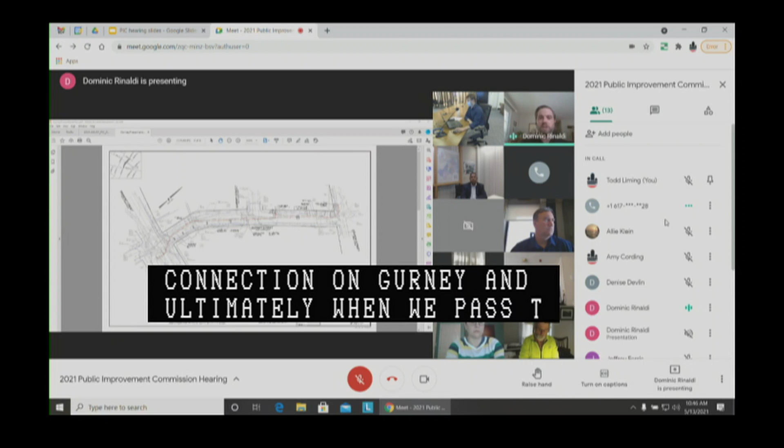We'd be looking to actually close down that portion of Gurney and detour folks on Tremont around to Parker Street, and back on through this connection on Gurney. Then ultimately, when we pass this intersection and can sort of hug the western edge, we can reopen the street and go to 2 lanes of controlled traffic on Gurney. Actually, it's 1 lane because Gurney's a 1-way.

I'd open it to any questions the commission may have. Thank you, Dominic. Any questions by commission members regarding this petition? Hearing none. Comments by PIC staff? None. Any members of today's audience? Seeing none, we will mark you up for 2 weeks, that would be May 27th.